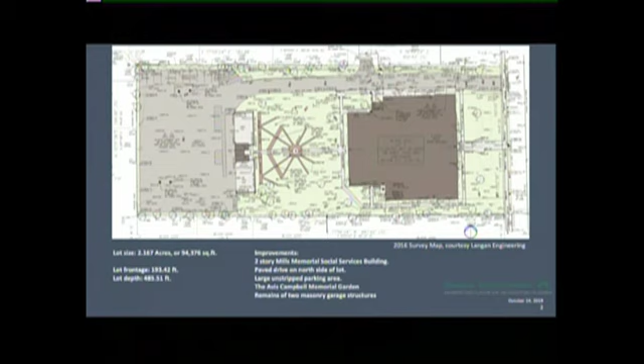So the building, as Kathleen said, was constructed in 1951, and it was constructed by the Davella Mills Foundation, a philanthropic foundation that was started by David Mills, and then the foundation was named after he and his late wife.

The original intent was to convert the house that was on the property. Since this was the late 1940s when they were planning this, the intent was to convert the house into veterans housing for veterans of World War II and their families, but the heirs of the property didn't give permission for that to happen. So the house was torn down, and then the Davella Mills Foundation sought approval from the Board of Adjustment.

This was not a permitted use. It was an R3, a multifamily residential zone for this property. So they had to go to the Zoning Board of Adjustment in 1950 to get approval to construct a 32,000 square foot social services building.

The Board of Adjustment approved this in 1950, and when the building was completed in 1951, the property and the building was turned over to the community chest, which eventually was turned over to the United Way about 20 years later. The fourth slide shows the drawings that were filed to the Board of Adjustment in 1950.

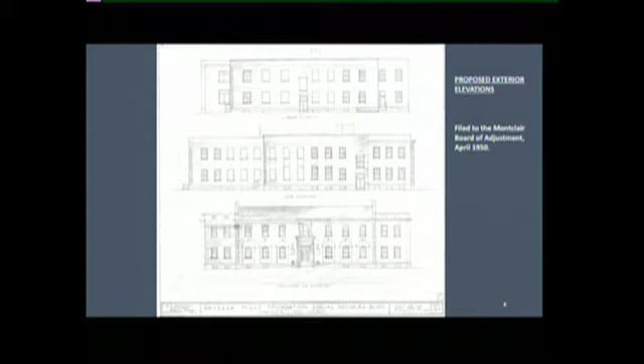As you can see, there's not a lot of detail on the drawings, but these are the drawings that were approved for the building. Again, it was William Bartlett's office's drawings for the building. It showed 3 elevations, not even all 4 elevations.

Next slide, slide number 5, was the site plan. As you can see, it's labeled scheme number 9, so they went through 8 schemes before they came up with the final site plan, which is what is constructed today. This drawing was dated August 27th, 1951.

As you can see, the plan indicates a large paved parking area at the rear of the lot, in addition to two dry wells at the rear of the property, shown by these two rectangles. No parking stall striping was indicated on these drawings.

An earlier plan from 1950 showed 12 garage stalls on the south side of the property, where I'm pointing, on the Union Street side. The foundation came back to the zoning board in 1951 with this drawing, moving the garages from the south side of the property to a more central location, with 8 indoor garage spaces.

The original intent, as stated in the nomination report and in the history of the property, was for there to be a garden between the building and the parking area. The idea was that this garden would be a memorial to David Mills and his philanthropic efforts. He also donated the land where the Mills Reservation is.

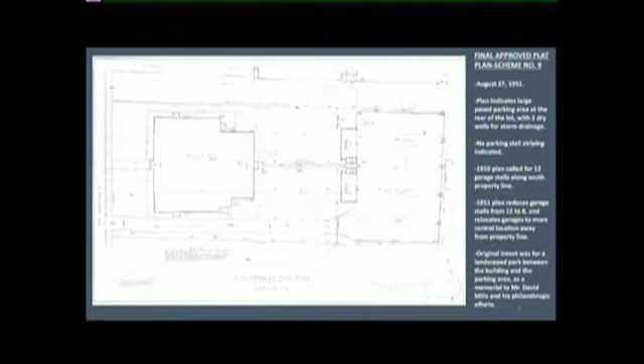Next slide, number 6. Slide number 6 shows photographs taken by our office of the Avis Campbell Gardens in the last few months. In 1952, a garden was constructed, but it was not yet the Avis Campbell Gardens—it was a public display garden, originally known as the Garden Center Gardens.

Now the garden is named for Avis Campbell, who was a landscape designer and Montclair resident. The design of the garden, as you can see in that top right photo, is based on the Wheel of Life, radiating out from the center where the fountain is today. The Montclair Garden Club maintains this garden.

Slide number 7 has 2 elevations: the front elevation, which is the east elevation facing South Fullerton Avenue, and also the west, or rear, elevation. As I stated before, the proposal is to renovate this building but bring it up to the 21st century.

And also continue its use as a social services building that supports the community. We'll talk about improving the site, such as the parking area, landscaping, lighting, and very importantly, storm drainage. Then we'll hear about exterior restoration, such as masonry repair and cleaning, window replacement or repair, and construction of a garden-level patio with new openings to the patio.

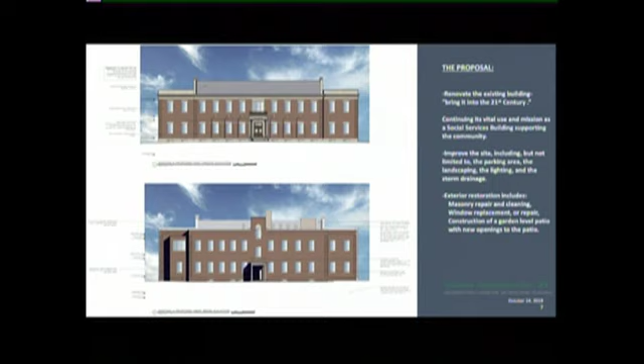Slide number 8 shows 2 additional exterior facades. The copy you have of the bottom drawing is not rendered or colored, but on the slide on the screen, the bottom, or north, elevation is rendered. The exterior facade of the building consists of a combination of masonry block units with a brick veneer attached as the finished exterior. Limestone trim members are utilized at selected locations on the facades.

All of the exterior window sills are limestone. Most or almost all of the rooftop parapets have metal copings at the top. Portions of the facades also have limestone copings. The east portion of the roof towards the front...

...which has the slate shingles, has a gable-framed roof structure or penthouse. Your package says that it contains the elevator equipment room, but it doesn't—that was a typo in this handout. The slide correctly shows that the elevator equipment is in the penthouse directly to the rear of that gable. The gable-shaped roof at the front contains some HVAC equipment.

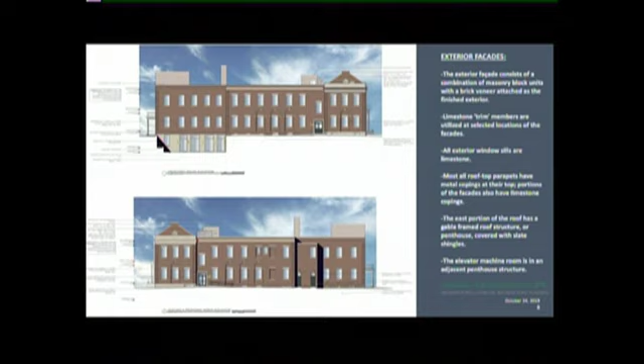So the areas of concern that were pointed out in the conditions assessment survey were that the front portico was unsafe, masonry joints were expanding and separating at the building corners, there were rusting lintels above the windows, expanding and damaging adjacent bricks. There's a lot of brick repointing that was done inappropriately over the years. There's improper caulking of cracks in the facade.

There are open cornice joints along the upper edge of the facade and the cracked cornerstone. Also, there are shrubs and trees that were planted right up against the building foundation. They're overgrown. They're damaging some of the areas of the masonry structure.

The next 3 slides are damage maps that were prepared. Actually, Jackson prepared these drawings, and Jay will discuss this in more detail. But in addition to looking at Betsy's conditions assessment survey, Jackson actually physically went around the building and prepared these maps to show where the damage is and what the conditions are of the building now. As I said, Jay will get into this in more detail.

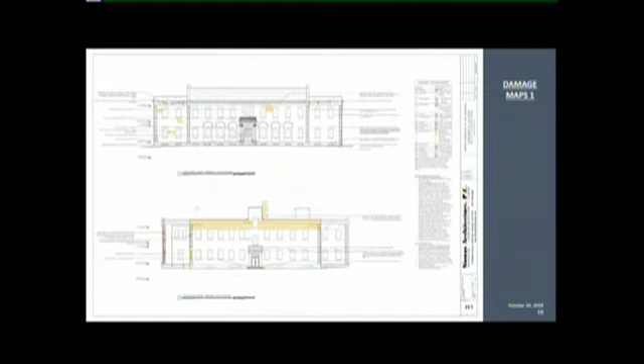And those 3 pages are slide number 10, which is the front and rear facade, slide number 11 are the 2 side elevations, and then slide number 12 refers to the rear garage structure that separates the garden from the parking area.

Next, slide number 13, I'll go through floor plans. So the garden level plan is the lowest level of the building. Originally it was called the basement. It's now being called the garden level. So the entire floor level is really drab and dimly lit. Water infiltrates into the building through the window wells around the perimeter of the building. The window wells have plastic covers that are broken.

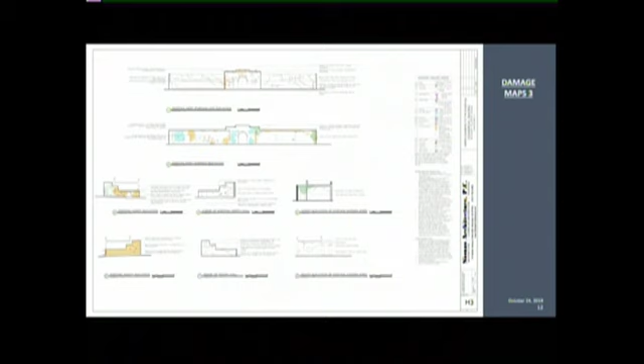And there's a large sunken boiler room from 1950 at the top left side of this drawing. In other words, at the southwest corner of this lower level, there's a boiler room from 1950 that's not necessary anymore. It has like a 15-foot tall ceiling, but it was typical of 1950 when there was a lot of mechanical equipment and they needed a sunken room to place this equipment.

So our goal is to take advantage of the high ceiling in that boiler room to gain good quality social services space with a lot of natural light, with a private outdoor patio at the southwest corner of the building. As far as the rest of this garden level, the plan is to install all new finishes, new fixtures, and lighting throughout, and for the first time, create new ADA or barrier-free bathrooms at all 3 levels of the building.

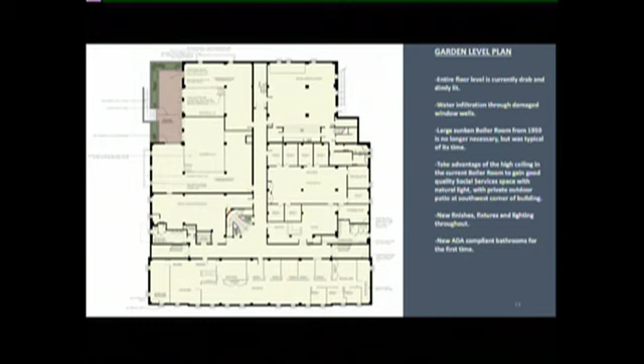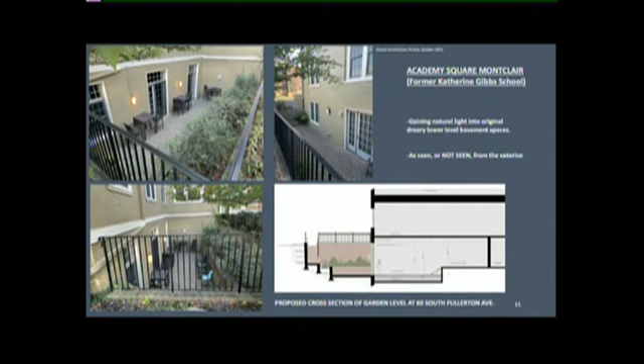The next slide, number 16, is the first floor plan, and again, the entire floor level is very dated. It shows that it's from 1950. The only words I could use is that it's currently drab and dimly lit. Not an exciting place for people who come to the social services to visit. So again, the proposed are new finishes, fixtures, and lighting throughout.

Again, new ADA bathrooms. And then one feature is to create a new stairwell in the center of the building from the first floor down to that garden level to get light to spill down from this upper floor to that lower floor, and then to have indoor planting on both sides of that stairwell.

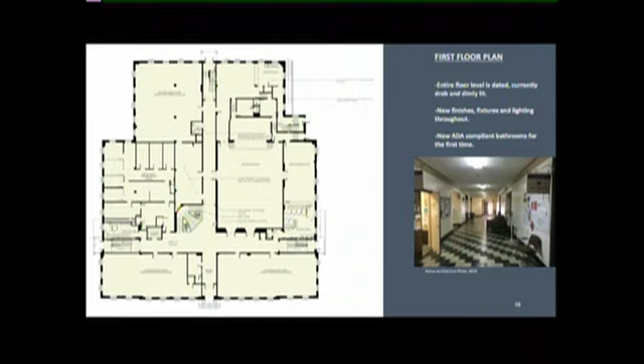The next slide, number 17, is the second floor plan, which is the upper floor. Just like the other floors, it's dated. It looks like it's from 1950 and hasn't been touched. The proposal, again, is new finishes, fixtures, lighting, new ADA bathrooms, just like the other 2 floors.

A large portion of the second floor is just the upper level space of the auditorium. So there's what was a beautiful auditorium, which will remain in this building, which has a 2-story height with a vaulted ceiling. And that's shown on that bottom right photograph.

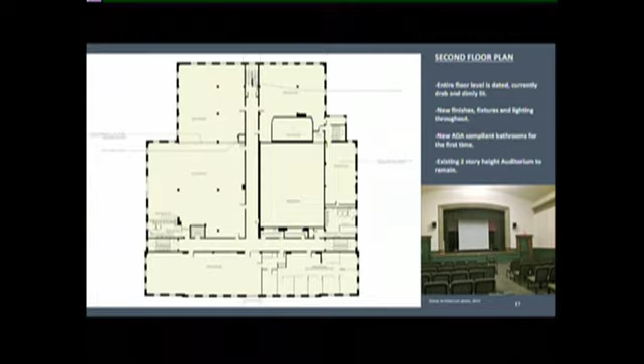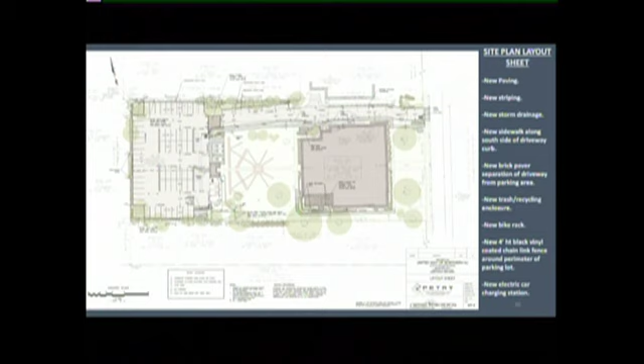Next drawing slide is number 22, which is the landscape plan. So the first thing we looked at with the landscape plan was to remove the overgrown trees and shrubs from the building foundation. If you've been by this building and look at the front of the building, there are two beautiful magnolia trees in the front lawn. Those are staying. No reason to remove those, but there's also trees that were planted in that space between the building and the front sidewalk.

Should not have been planted there. It's barely enough space for shrubs. So most of the shrubs are overgrown, the trees are growing up against the building, covering the facade of the building and the windows. We're also calling for removal of overgrown, dead, and dying volunteer trees. So the predominant tree that surrounds this parking area is a Norway maple tree. Those were not planted by anybody. Those were volunteers. They grew like weeds around this property.

So we've come up with a landscape plan. We're working with the Montclair Garden Club, consulting on selections and also placement of all new planting. But the goal is to have all of the new planting be native to northern New Jersey, in particular Essex County. So there's a plant schedule on the top right side of this slide, and all of those are native species selected to have a variety of height, spring color, summer color, fall color, provide canopies in certain parts of the property, and also to surround the parking area with evergreen shrubs.

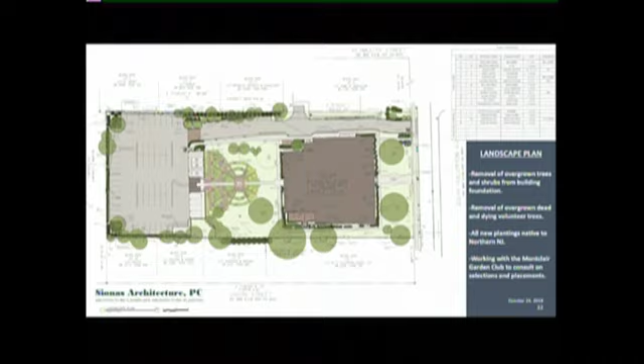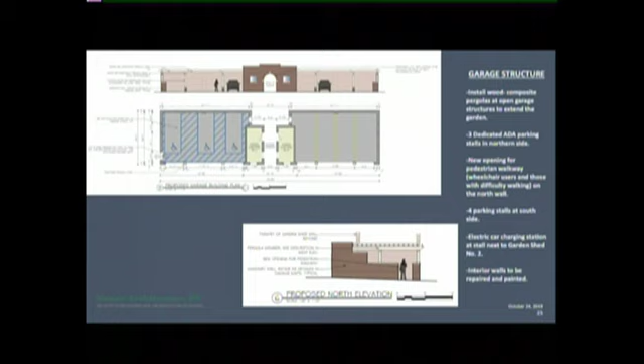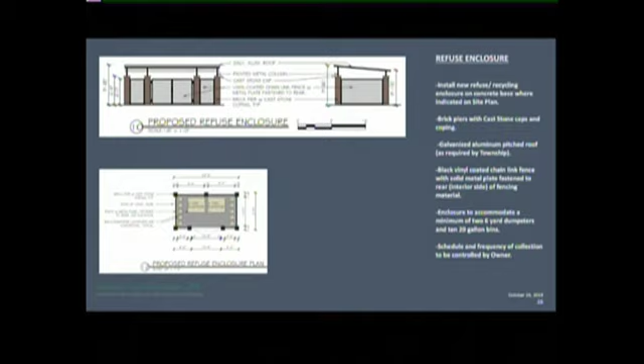The last slide, and this is again just to reiterate that the proposal is to renovate the building, bring it into the 21st century while continuing its use as a social services building. That's totally supportive of the community, just as it was in 1950-51. There's a real need for social services. When the building was built, there was space for Girl Scouts and Boy Scouts and other social agencies. So the mission's still the same now. There's family services in here, the Garden Club is in here, United Way is still in the building.

And I think what I'd like to do is turn this over to Jay Cardinal, who's our preservation expert. Okay, my role so far has been to evaluate the building conditions. This is a Neo-Georgian or colonial revival building. It's very simple in its design. It economizes a great deal on the architectural ornament.

It uses most of the ornament on the front facade, where there's a limestone portico, there's a limestone porch, the paving is limestone, and the steps are limestone. There is selective use of quoins at the top of these brick arches over the 6 central window bays, and on this facade only, and on the east facade, they have limestone lintels and sills, and that's not true on the other facades. They only have limestone sills.

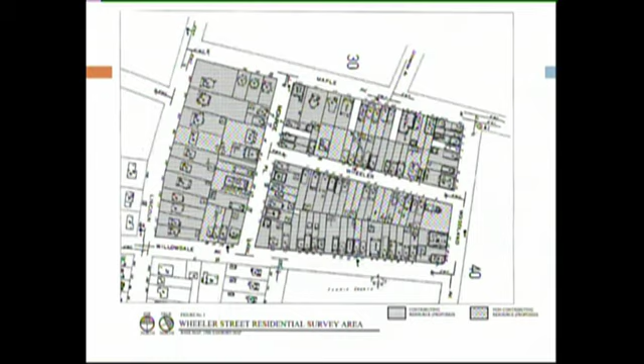Along Lincoln Street and Maple Avenue, we had seen development prior to 1910. This is a sample of one property built circa 1897, a traditional American four-square in excellent condition. It does have a mid-1970s application of what's almost like asbestos siding, but I didn't think it detracted from the detailing in the dormers, roof, windows and porch, which made it key contributing, also due to its age.

This is also pre-1910 development - a 1900 Queen Anne in fantastic condition, with its original materials in place. Its detailing was so well preserved I could barely detect what were additions and what were not.

The one thing I found in the Wheeler Street neighborhood was two predominant architectural changes. One, very few original windows are intact - most have been replaced at both the two-family residences and the apartment buildings. And there's a fair amount of new siding applied over existing siding, really an application over earlier siding rather than wholesale replacement of the original. There are a few examples of wholesale replacement, and I consider those non-contributing.

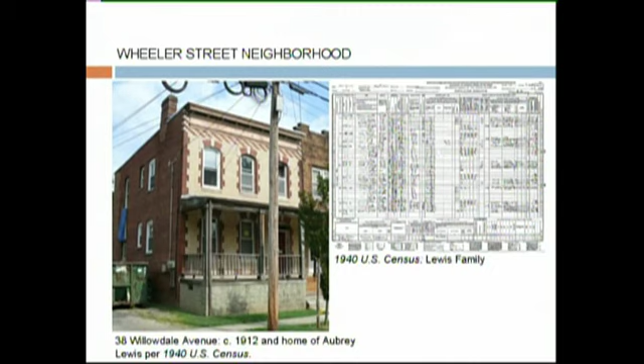So Oakcroft, a little different history, same kind of influences in that Montclair needed housing, and somebody came back and decided to build housing. This was more on a grand scale, whereas Wheeler was on a building-by-building scale. The greatest impetus for Montclair's development, and particularly Upper Montclair by the late 19th century, was the railroad.

Anderson Park, located right next to the Upper Montclair Railroad Station, was apparently one of the driving forces for Aaron Godfrey, who was, from what I could tell, a dabbler in many industries and professions before settling on real estate development. He brought forth the vision for Oakcroft in what was really a drainage pit for a drainage area for Second River, coming off the mountains. So he maneuvered the landscape—you can actually see how he did that on Brookfield with the stream that's visible on that street.

He had a plan in 1910, though he'd already started building before that, for 100 homes for the Godfrey Land and Building Company. A number of houses, I think 6 in total, were featured in American Homes and Gardens magazine. They were all built by the architectural firm Freeman and Hasselman out of New York. By 1916, he had built about 47 homes, but there was also other development, and a lot of developer-builders continued to construct through the 1920s and 1930s.

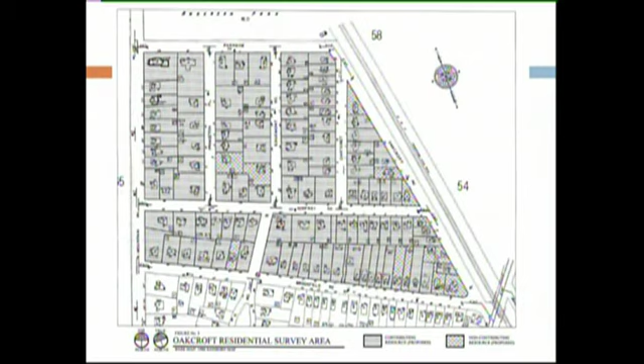So this is one of the properties that was constructed prior to Oakcroft's development, 65 Brookfield Road, which I know the owner. This is a really good example of the shingle style. Very few changes were made to the building - it was a wood shingle roof, and the roof is a prominent feature. They added a garage, and it took me a couple times to even notice it, so that was really well done under the porte cochere. It's a really well-maintained building, and the use of stone at the base is just exquisite.

So there's a number of these properties that were constructed before Oakcroft got involved, which could have been his influence to get into that area, since there was already a fair amount of decent housing stock, and then Anderson Park being probably the more attractive feature, and the railroad, since you could walk to it.

This is another property, 305 North Mountain Avenue. It's a Queen Anne, again high integrity. I want to say the windows were replaced here with 1/1s, but as you can see, the porch is well executed in how it's enclosed - the detailing, the corner boards, the narrow clapboard siding, how they alternated the windows with the shutters, just to give it more variety and really pump out that turret.

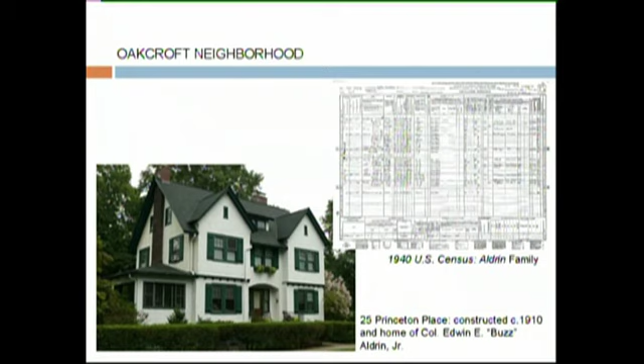So the Wheeler Street neighborhood, I am recommending that you consider it for a local historic district with a period of significance of 1910 to circa 1930, which is the year of initial development when you first see some of the two-family houses in the area, geared specifically for working class families, followed soon thereafter by the apartment buildings, through the end of the prolific construction, circa 1929, 1930, due to the Great Depression. You see a complete drop-off.

The area is developed as much as it's going to be by the 1933 maps. And you're now actually seeing more development in the last 5 years in Wheeler than you probably have seen in the last 30 years.

I believe the district is significant under Criterion A for the development to provide multifamily housing for working class families, specifically the two-family and the mid-size apartment buildings, in response to the rapid growth in Montclair, due to advances in transportation, but also due to increased immigration and migration of African American families from the south, as well as, in addition to European immigration, you saw a little bit of immigration from Barbados and the islands.